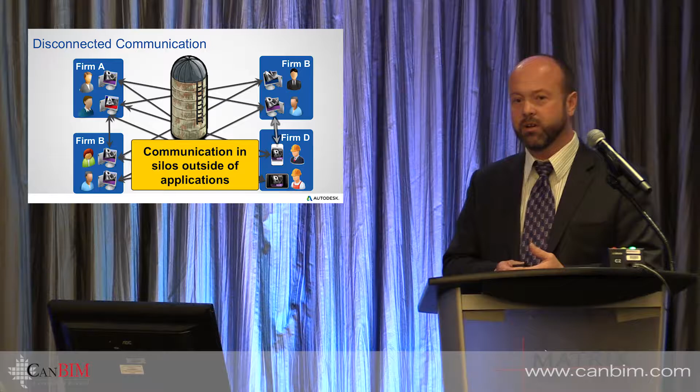You notice some of the symbols as far as highlighting software technology—Firm A is a highly efficient silo, Firm B is a highly efficient silo. Firm B on the East Coast and West Coast, both highly efficient, but they are in fact silos to themselves, and I think we all recognize that. Firm D, the construction agents, just trying to make sense of what firms A and B put all together.

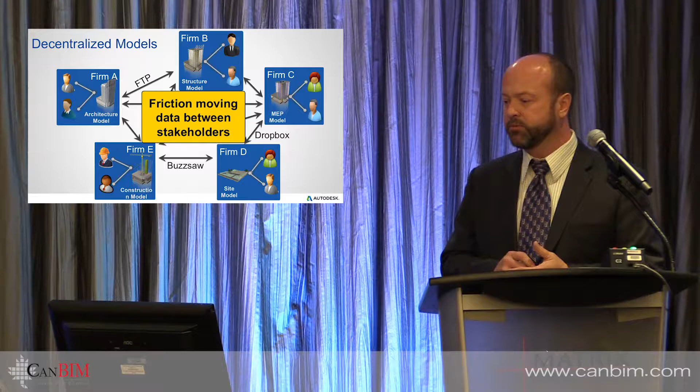So it causes a lot of friction to move that information back and forth. The mechanisms for pushing all that—FTP, ProjectWise, Box.net, Buzzsaw, Dropbox—big files take a lot of time to move that information. It's not a living kind of file; it's really not the promise of live, real-time change to a project delivery. That friction is one of the underpinning ideas to what we're going to talk about next.

Within the idea of the success of social media—I did take a moment to think about it, and read some stuff too—I attribute the success of social media to cheap hardware to the masses and giving everybody a voice from that cheap hardware. So cell phones, Twitter, Facebook—that's your mass distribution through cheap hardware to get information out.

So the challenge we're trying to address for many of the consulting firms like yourselves out there: somewhere you will be paying IT labor, you will be paying hardware costs, and you will see it as an expense item. If we can go to cloud successfully, I would see costs coming down with the same amount or more usage that you would be able to get out of your BIM.

So somewhere, someplace, it's being paid for today. What are the chances of making that cheaper, moving it to the cloud? That's really software as a service, not just as a service repository. So let's get a gauge on the market precedence.

Is anybody here using messaging tools to run your projects? Is anybody using Facebook as a project page for your team? Is anybody using Lync or Communicator for in-between project messaging? A few of you. Is everybody else using email for project communication?

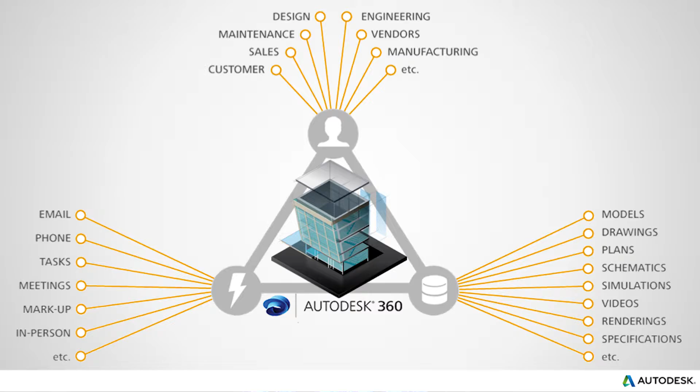So if and when you get these presentations, or at least a view of it, you can take a picture if you want. You've got all the data and the team up here - models, drawings, plans, specs, whatever over here, all the email, phone, tasks, meetings, and markup. This is a hub of cloud storage which permits use across firewalls.

So you saw that slide. I'll just reverse this back a little bit.

You'll see this next slide build out. Just like social media shows an update and status, your project environment now can have that similar look and feel, whether you like it or not. I'm really starting to like this approach because it filters out a pile of other junk specific to a project.

If you're a project user on any software, you can show up as a team within the people. You will see recent changes within your project that you're assigned to by the administrator, and you will also see live feeds of people's changes to the project.

If you're just a single user, a cog within the bigger wheel, dedicated to one project, you'll only have one project to see. So it's very straightforward, simple, and administered through secured environments.

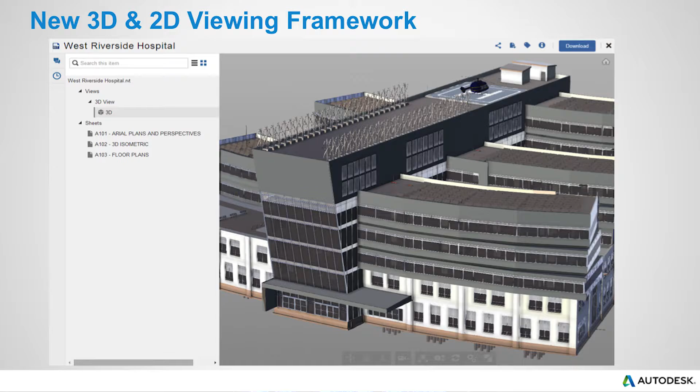This is another new component. We call it the Large Model Viewer, or LMV. Within the Large Model Viewer, my director, sitting in Starbucks on his iPad using Safari, or on an Android device like a Samsung tablet, can access it.

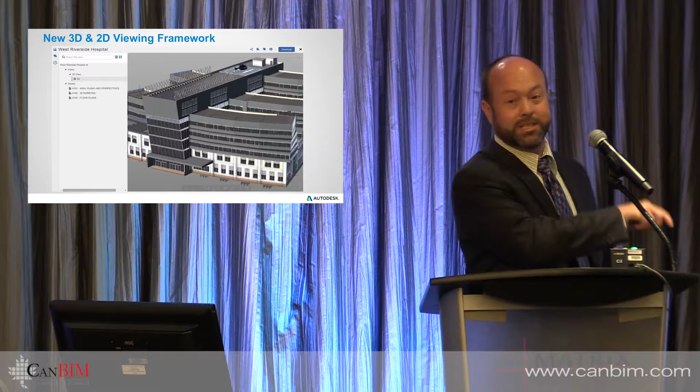This viewer is inside the browser — it's not an add-in. So basically my director can browse this model. This is the Navisworks engine running in the browser in the background, but the data is all repositoried into the cloud. So there's no need for synchronization of his iPad to the cloud — he just needs an internet connection to grab it, and then he gets to see all the pre-saved views within that.

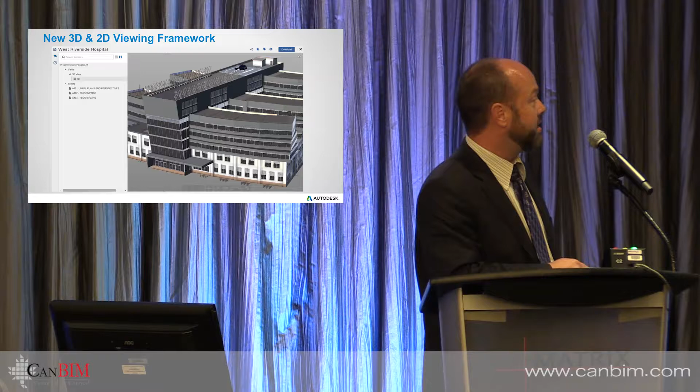Here's an example — I'll go to the next screen, and there's a small video included with this. On the left-hand side is the Large Model Viewer, showing the structure of the building: roof, pads, all the elements of the building itself.

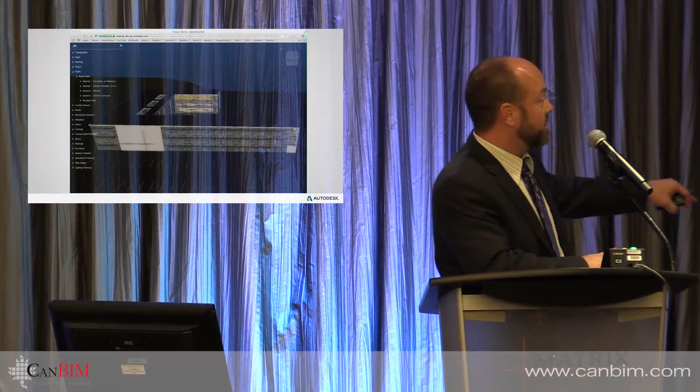You can see how it will ghost out elements which are not selected in the left-hand index. So if I click on walls, basic wall, it'll highlight the items like basic wall, generic wall 200, parapet, and ghost out everything else automatically.

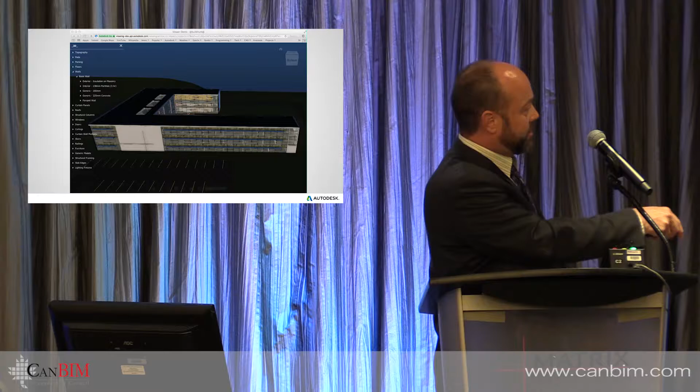So your director, your contractor, your sub, they're hitting the internet to get this information. It's very fast and robust — this is a DWF drilling through the internet, so it's not a 40 or 100 megabyte file. This is the LMV, the Large Model Viewer, and there's all the property information on the right-hand side when you choose an element or item.

Okay, seems to make sense a little bit? Pretty easy to follow. It's not highly technical here.

That's great, thanks Alex. Which kind of brings me on to the Autodesk 360 mobile, desktop, iPad, Samsung application. They're not apps, it's just the browser. Inside of the browser, on the left-hand side, we try to maximize screen space and just give a few icons, which should be familiar to you as social media gurus. It's on all mobile devices, which is important.

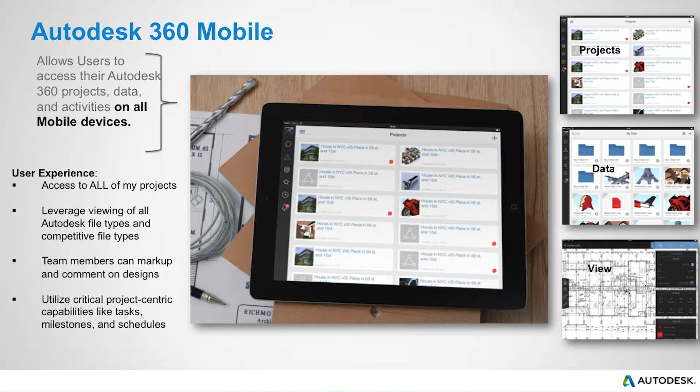Access to all of your projects, leveraging viewing of all Autodesk file types. We're a little bit selfish, so you'll be able to see DWG, DWF, NWD - it's the Navisworks viewer if you get the drift. It's allowing you all of that.

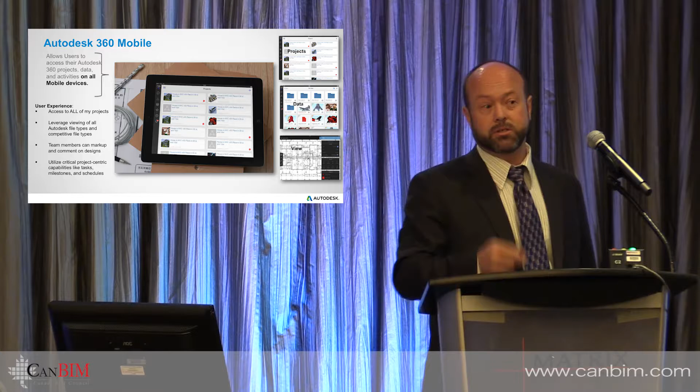Team members can mark up and comment on designs right there. I heard Dave McCarker talk about his markups with Glue - very similar, Glue has its own application. This has a very similar kind of application to it as well. And then assigning the tasks.

On the right-hand side, these are screenshots. When you want to look at the projects, they show up in very nice thumbnailed views - the projects, the data associated with the projects, and the view. In this case, it's a floor plan of the data. So those are different screenshots compiled together on that screen.

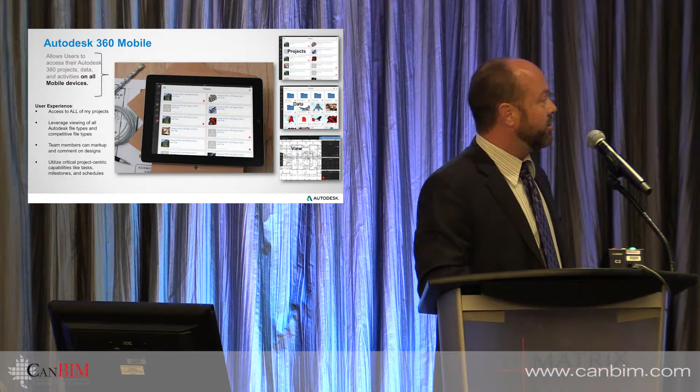And then lo and behold, this is my director's smartphone as I basically do my sync. A new notification pops up, he checks it out on his phone. He's a happy camper, and if he's a happy camper, I'm a happy camper.

There's confusion, I think, that'll come out of your future investigation into this. There's Autodesk 360, also called A360, and then there's also A360 Team. A360 is free for everybody to use - there's a certain file storage capacity that you get, it's free. And then you've got A360 Team, which is a paid service engagement, monthly or annually. We actually do not sell software anymore when it comes to 360 tools. Basically, you can tie the software usage to your bottom line on the project rather than investing in it like a piece of desktop software.

So, accessing the project data - this is the sweet spot. This is the most exciting piece for me since BIM started to originate from us in 2004, our version of Revit incorporating it into BIM. Skyscraper, for those of you using Revit, is going to be the night and day difference, and hopefully - I don't want to oversell it, but I'm really excited over it. It'll solve a lot of stuff.

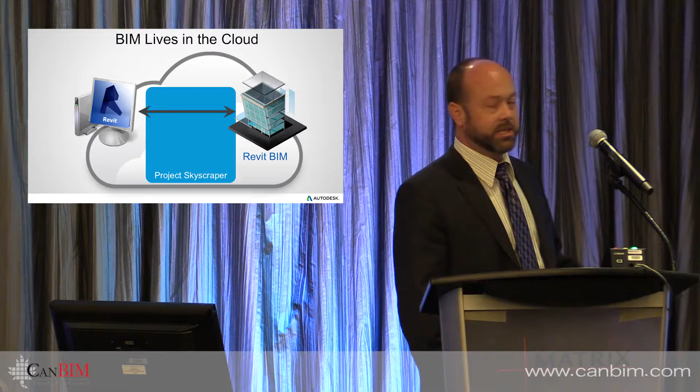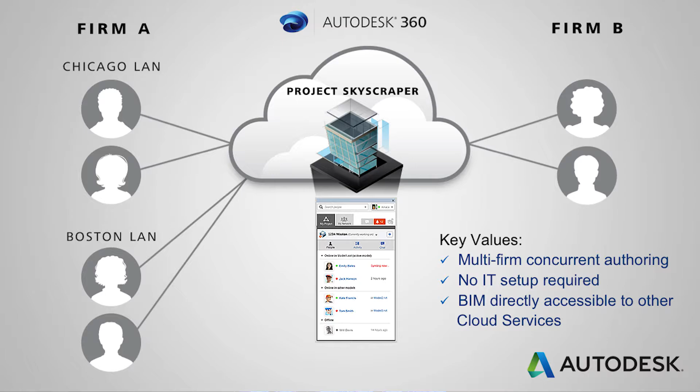Skyscraper basically takes the Revit model and puts that Revit model up into the cloud - our cloud. There's that first step. The whole goal, or the value proposition, is these key values of multi-firm concurrent authoring. Those are three serious words put together that it says it does - multi-firm concurrent authoring. This is a good thing at the bottom.

No IT setup - that's always good. And BIM is directly accessible to other cloud services. So if you want to tie it to analysis, you don't have to come down to your desktop to tie analysis to your BIM - it's already in the cloud, and we will tie it together for you. So this gets around the firewalls - Chicago, Firm B, Boston through a local area network - it all connects up to Skyscraper.

Within the next step, you're also instructed what team is going to be associated with this project. You go ahead and add those people - they would have an A360 account, typically using their email address, and then you would add them to the account. You can add and remove people as you go as an administrator.

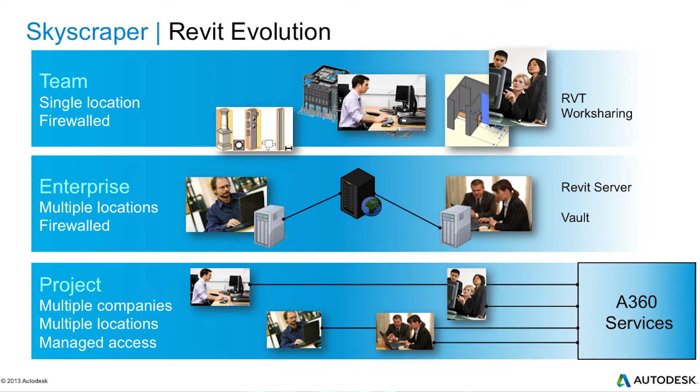So where we're moving from is a single file location that's firewalled. Some people here are doing Revit Server, which is only localized to a wide area network within one company or through a tight VPN at best. But now we're talking Skyscraper, and all of these companies leveraging the A360 service get to experience this.

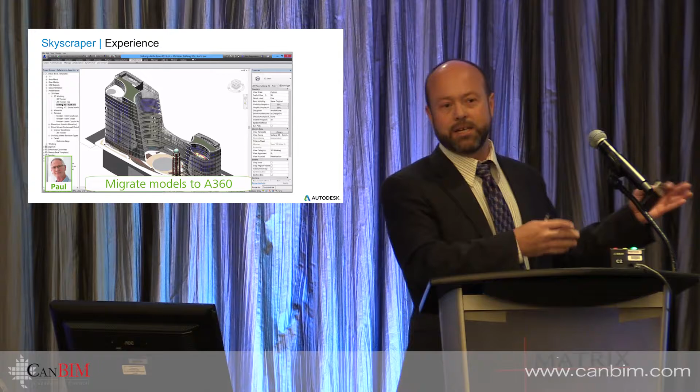These are just some screenshots of the video I'm going to show at the end, because the video runs so fast I can't talk to it. But here's the idea of how it would work to give you that first impression.

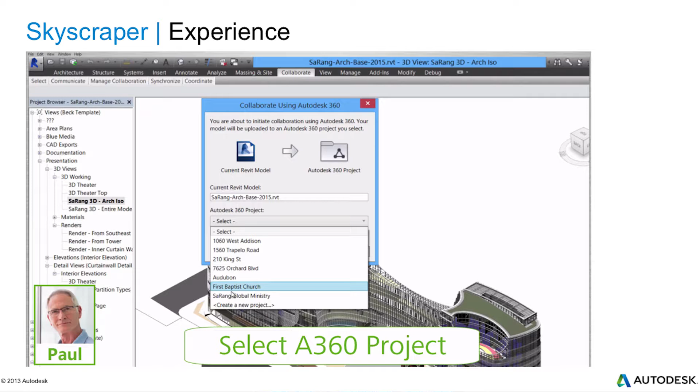Paul, part of one office, has Revit open. He wants to migrate the model up to A360. So Paul launches the add-in to Revit and says, out of all these projects on my server, I want to send the First Baptist Church up to A360. When he does this, it's like sending it away to the cloud. It uploads, and then we close it out.

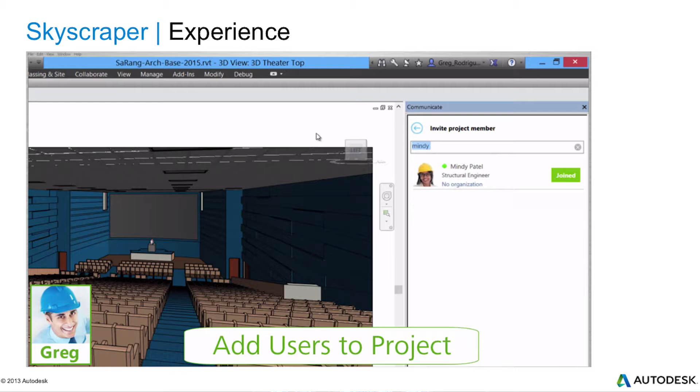Paul has already invited Greg to the project. Greg has some administrative privileges and invites Mindy Patel to the project, again through the Revit interface. Within that, Mindy now has access to A360, and you can see in her file explorer on the left-hand side the hook into A360 up here—it looks just like she's browsing her own server.

Now she grabs it, and essentially what we're doing is worksets—you are borrowing elements just like you do today. Nothing changes there. It caches a file on your local desktop. You work on it, and other people work on the same file in a cached environment.

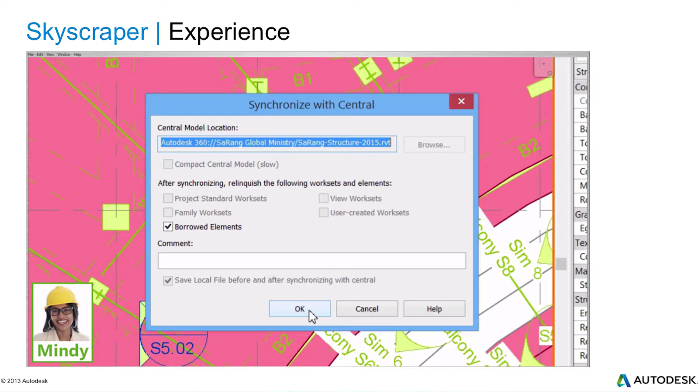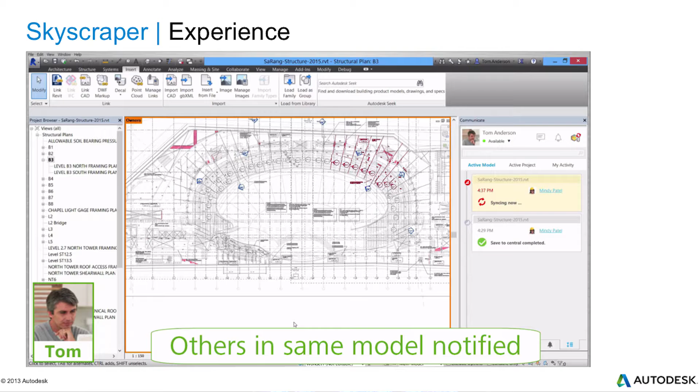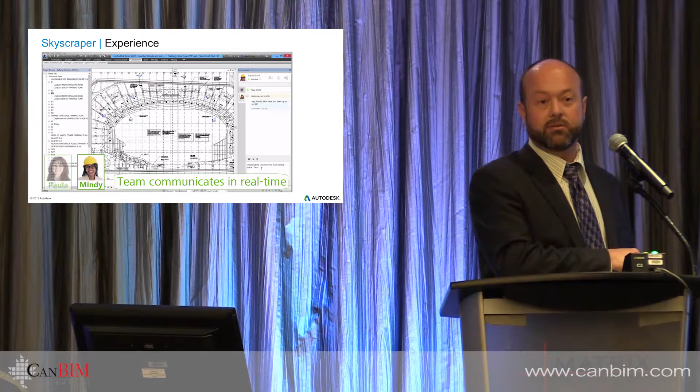And this is what I was saying about the services. Once you have the file up in the cloud, you can start associating other 360 services directly to that whole skyscraper model that exists up there.

So this is the really fast video—those slides I showed you, this is the video piecing it all together. Ready? Don't blink, it's really fast. Go ahead, Chris. There's Paul—watch it, he's a rocket.

He's making the project. He's got the project selected. Initiate the synchronization—and it's just that fast. 2,000 megabytes up to the cloud. Kidding.

There's Paula. And like I said, keep in mind, if you've got subs, you can bring your sub into the conversation midstream and then tie off their account. Bring them in, tie it off. They don't necessarily need to see the model all the time, but it'd be good to bring in some of these master subs to say, this is what we're thinking on our job, because it's a secured kind of environment.

Partners in the model are all notified based on what's going on. Here's the chat—Paula and Mindy are having a chat discussion around the stadium. And these are conversations which will also be tied back to the project, so there's a history of accountability there as well.